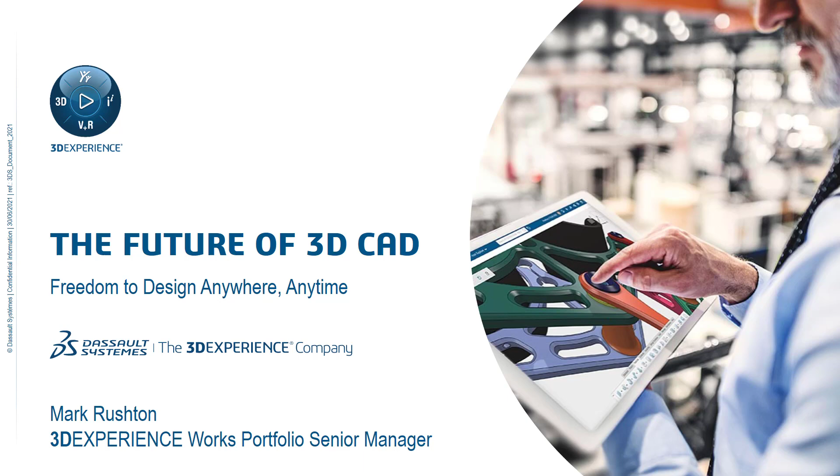Before we can look to the future, it's always a good idea to reflect on the past. In the early days, there were really two options for CAD: inexpensive 2D CAD, which was essentially an electronic drawing board, with very little in the way of automation, giving us the same kind of benefits you'd expect from a word processor like Microsoft Word did to written documents.

3D CAD was processor heavy and very expensive, but the visualization in 3D was a huge benefit. And when a new platform emerged in the early 90s, being Windows, SOLIDWORKS saw that as an opportunity to put the power of 3D onto every engineer's desktop.

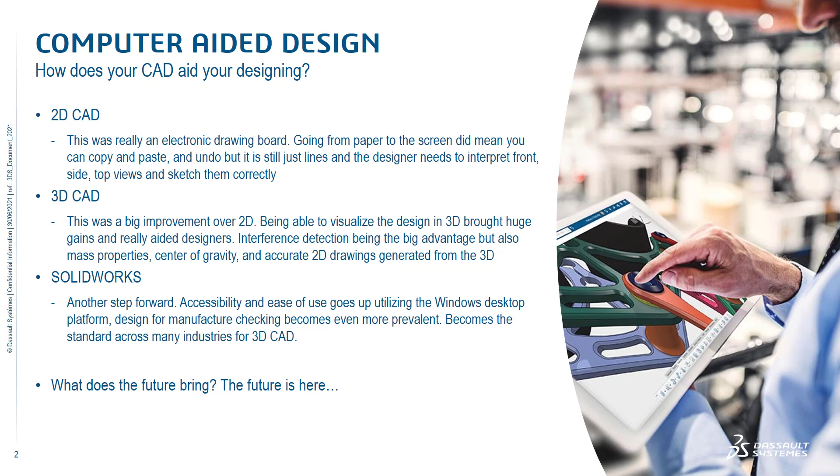And more recently, a new platform has emerged, and SOLIDWORKS is here once again. This time it's the cloud. We bank on it, literally. We communicate on it. We store photos of our loved ones on it. We use it for shopping, for dating, for entertainment. It's everywhere, and the last 18 months has only accelerated this pervasiveness.

But how does that help when it comes to the world of design and engineering? Well, design and engineering are key to competitive differentiation, and we are in the most competitive market ever. We need to differentiate based on innovation, quality, performance, and cost, and finding a balance of all of these is a challenge.

Coupled with the need to be fast to market in order to succeed and the ever increasing complexity of products, we need to make sure that bottlenecks are removed and engineers and designers can spend the maximum time adding value by addressing the needs of the market.

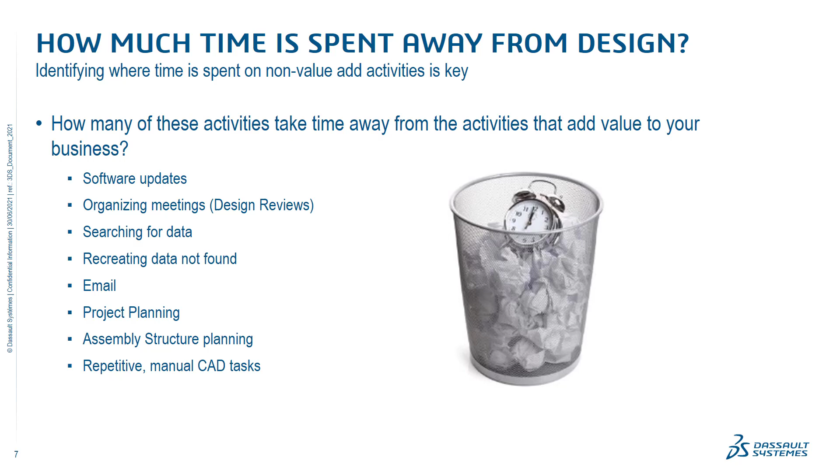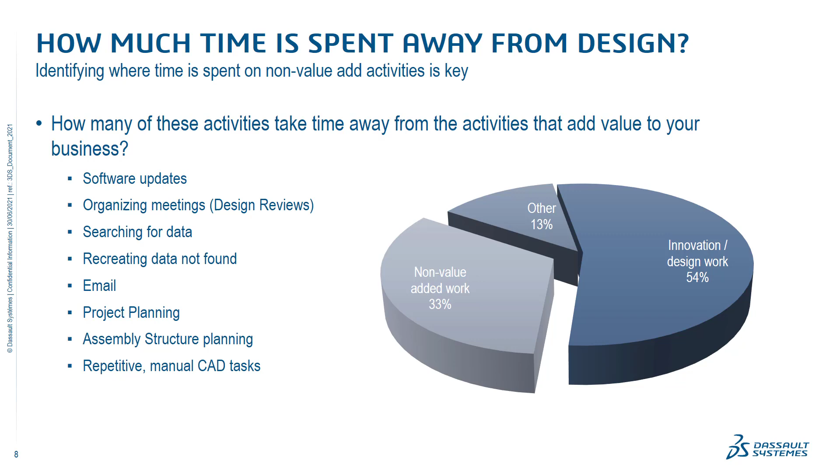We found that as much as 33% of designers and engineers' time is taken away from adding value, and only 54% is left for actual design and innovation. So what steps can be taken to allot more time to what we want our designers and engineers to be doing, what they are the experts in doing?

So at that point, we'll introduce the 3D Experience platform. It's a collaborative business innovation platform which puts the data at the center of it all, ensures everyone gets access to the information they should have in real time, but only the people that should have access. With it being a secure cloud environment, not only can you get up and running very quickly, but you can also access the data from any device, and there's no infrastructure to set up. It's all there ready for you.

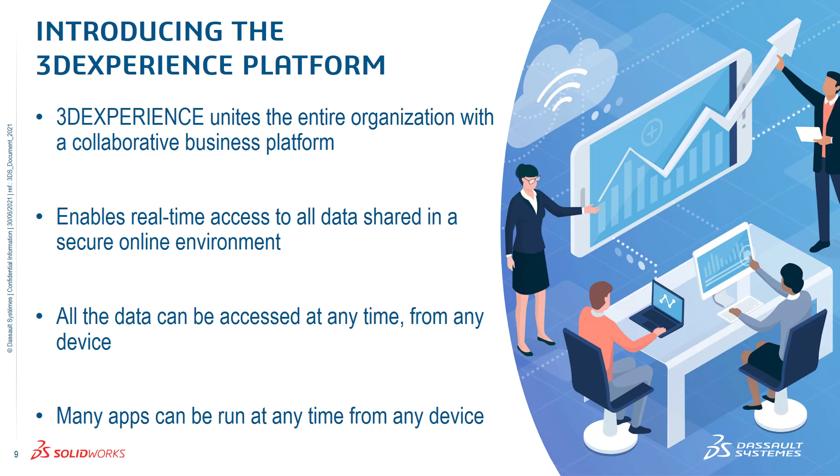There are also many apps which run solely in a web browser, so you can not only view the data from any device, but you can also create data, including 3D design data, which leads nicely on to the 3D Experience Works design capabilities, or roles as we call them. So today's webinar is really going to focus on the design roles developed by SOLIDWORKS, and we believe this is the future of 3D CAD, but it's available today. We have a full range of 3D CAD capabilities which run without needing installations or updates completely in a web browser.

If you want to work on an iPad, on the sofa, or on a laptop or desktop PC, you can just log in from solidworks.com and get designing. All the data you create is safe and secure on the cloud and can be accessed by whoever you want to see it, and only them, from any device they choose, even a smartphone.

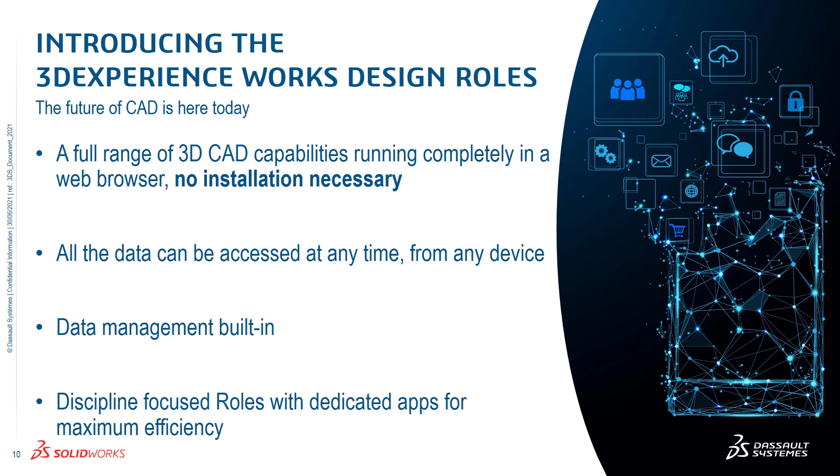When it comes to the design apps, data management is built in, so no need to worry about where the latest revision is, and the apps are discipline focused, meaning that you have the most efficient user experience possible. Nothing else to get in the way or make things harder to learn.

And when it comes to 3D design, there is no richer set of functionality anywhere else. 3D Experience Works offers more capabilities tailored to your exact needs than anybody else, completely in a web browser. And these are just the SOLIDWORKS branded roles. There are more from the other Dassault Systèmes brands and are completely interoperable with these. So you can extend and scale your design capabilities whenever and wherever you need them.

Let's quickly take a look at the browser-based SOLIDWORKS design roles. 3D Creator is the flagship and is the 3D parametric design solution, which is more than just CAD in the cloud. It comes with design guidance for inspiring new designs based on real-world loads and fixtures, reducing the head-scratching at the start of a new project.

Super features are patented technology from SOLIDWORKS. If you have ever started off with an extrude feature and then later realized you would have been better using a revolve or a sweep, but you already added a ton of child features, this one's for you. Super features allow you to change feature from one to the other without any loss of dependent features.

Revolutionary, but in a very evolutionary way. Not really any learning curve to adopt them. Then there's the unique design assistant, automating repetitive tasks and helping today with sketches, selection, assembly mates, but will be helping with much more in the very near future. This is really exciting technology and unique to 3D Experience Works.

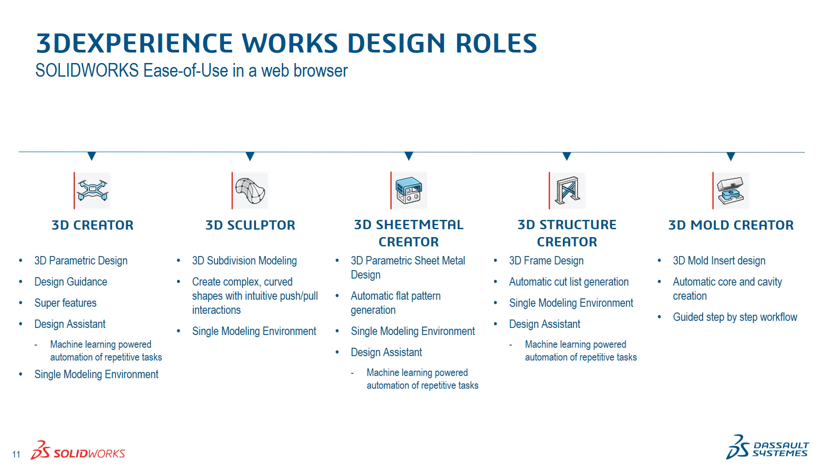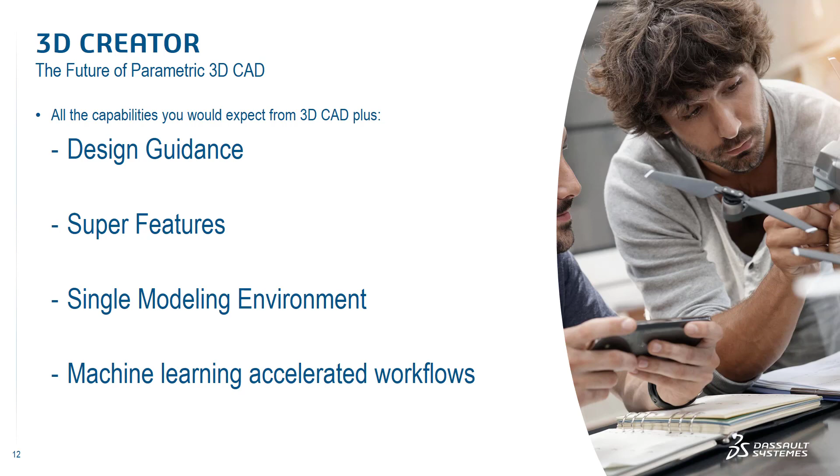So let's take a slightly closer look at what makes these design tools unique and allow you to focus on design. So first up is design guidance.

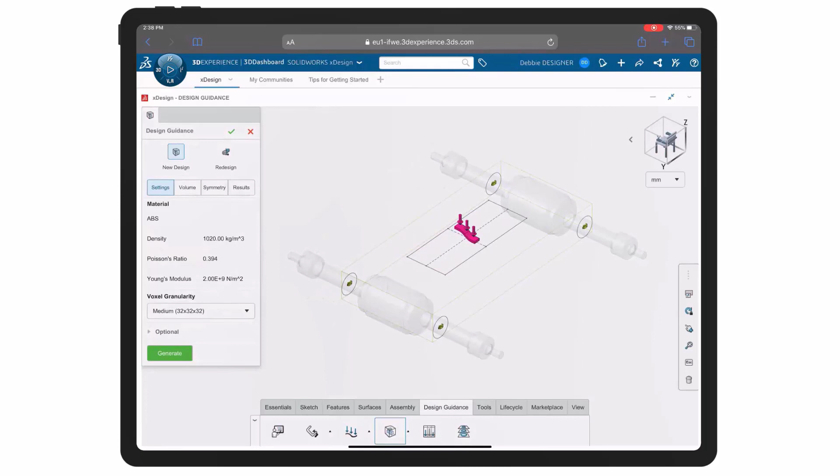Design guidance inspires your next design based on real-world loads and fixtures. This is powered by topology optimization, but it's so simple to use you would never know it. And as you can see, it runs on a tablet. It's optimized for touch interactions. If you like the suggested guidance, you have it there as a reference to make a parametric model from. Really powerful stuff.

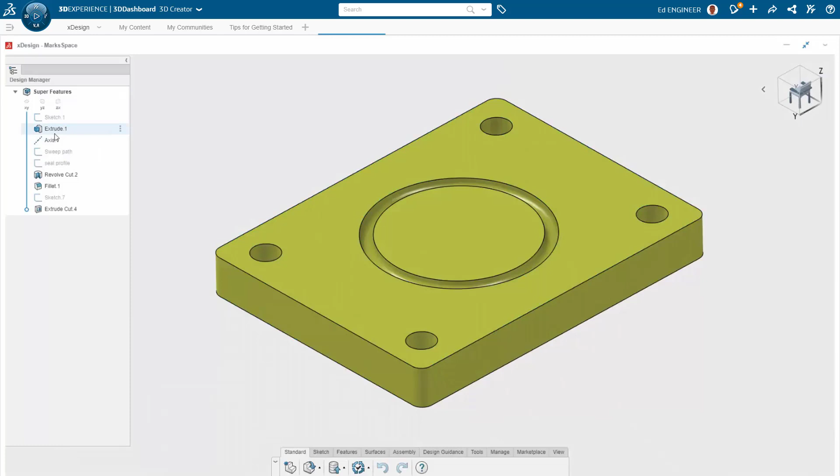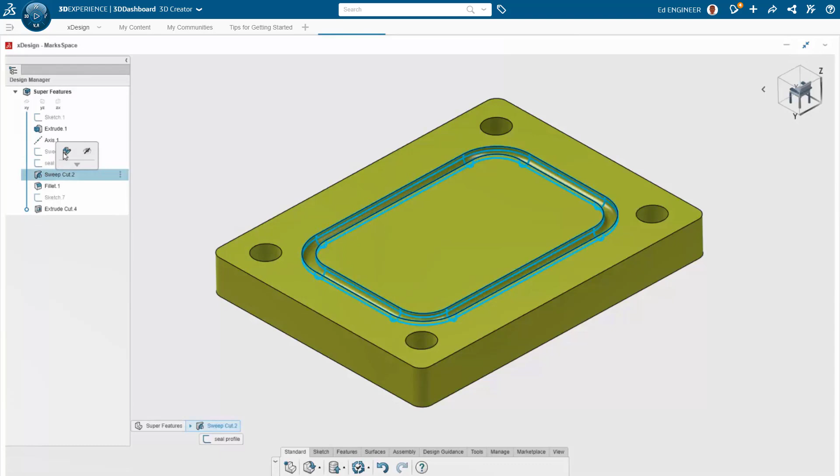Then we have super features. Here we have a revolved cut for a simple O-ring. But if the design changes and we need a rectangular gasket instead, all we need to do is add the path for a swept cut and simply edit the revolve cut feature, and we can change it to a swept cut, and we can change it back again, or we could swap it to an extrude cut if we needed, all without any concern for any child features. It's patented technology making parametric design so much more flexible and easy to use.

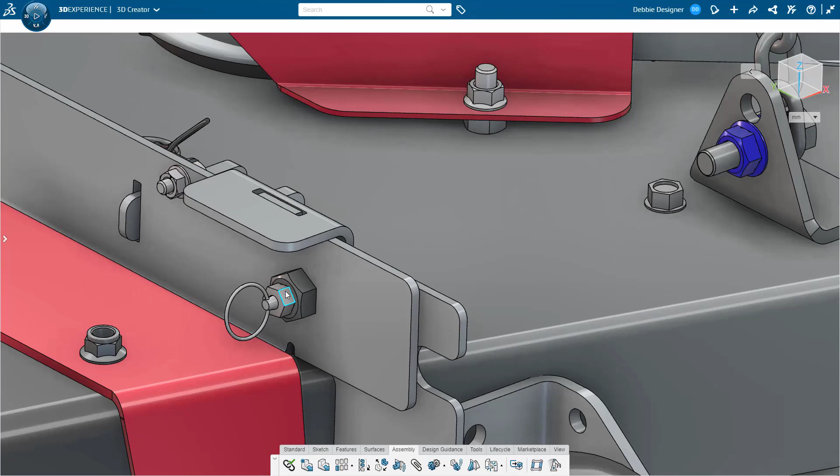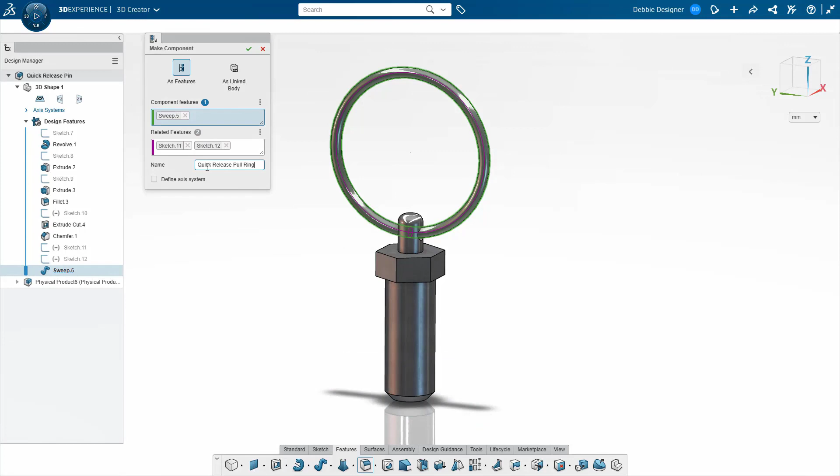Then we have the single modeling environment. Everything is a physical product. It can contain features, parts, or assemblies, and you can form sub-assemblies and dissolve them back to parts at any point in time. But here we can also dissolve parts back to features. So if we've modeled a design as a single part for ease, but the bill of materials really would be easier to manage if we made it an assembly, we can dissolve the part back to features, and then select a group of features which should be a part, and then the other set of features to make the second part, and then we have an assembly. So no need to redo any design work and no need to do any assembly structure planning up front.

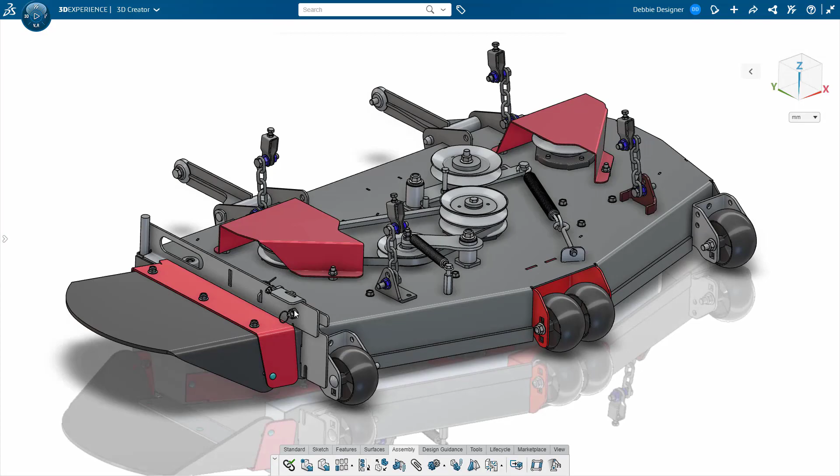Smart assistants are now part of everyday lives - to turn on our heating or air conditioning, tell us the weather, change the colour of the lights in the dining room, or order us extra soap for the bathroom. And now they're in our design tools.

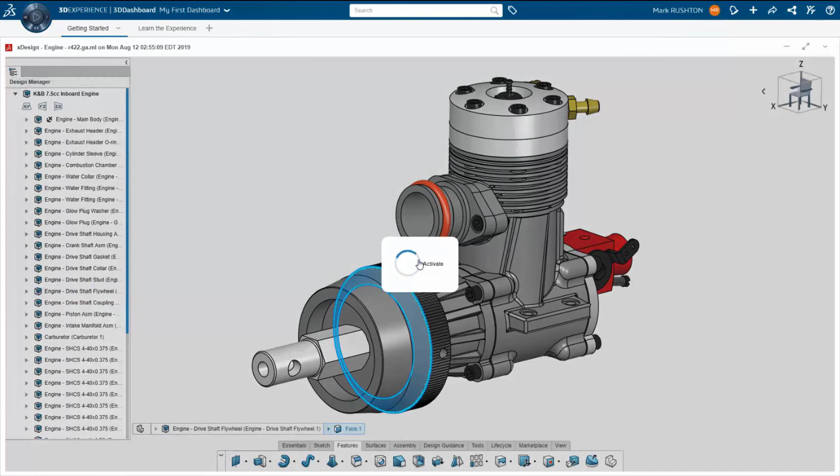Instead of us making lots of manual selections, let's let artificial intelligence predict the selections based on the first one. It recognises what we're trying to do and makes the selection for us. And the same is true for sketching - it can recognise underlying geometry, and it can also predict where we may need more sketch entities.

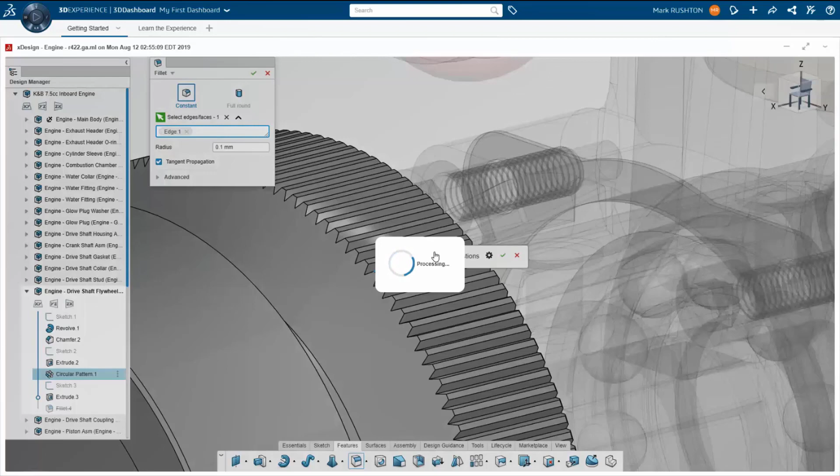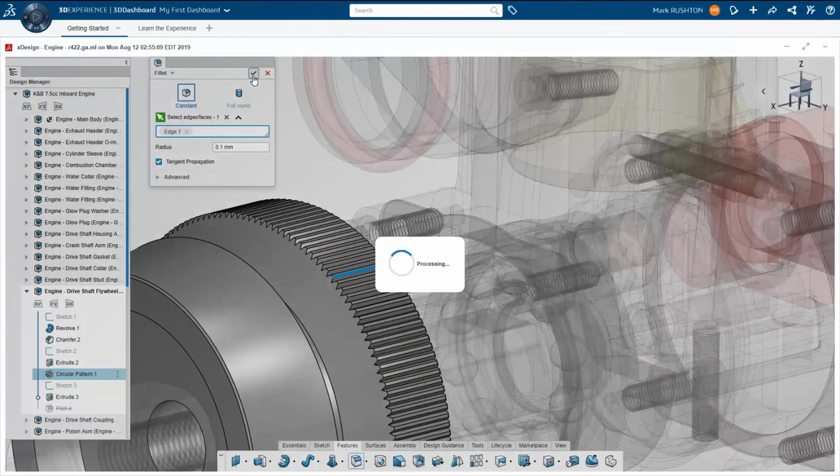So one selection followed by invoking the design assistant actually makes 312 selections in this example, all based on it being similar geometry in a similar direction, similar length, looking at the surrounding features. Real time saver. And it looks at more than just the direction - it looks at the sizes and the type of selection that we've made.

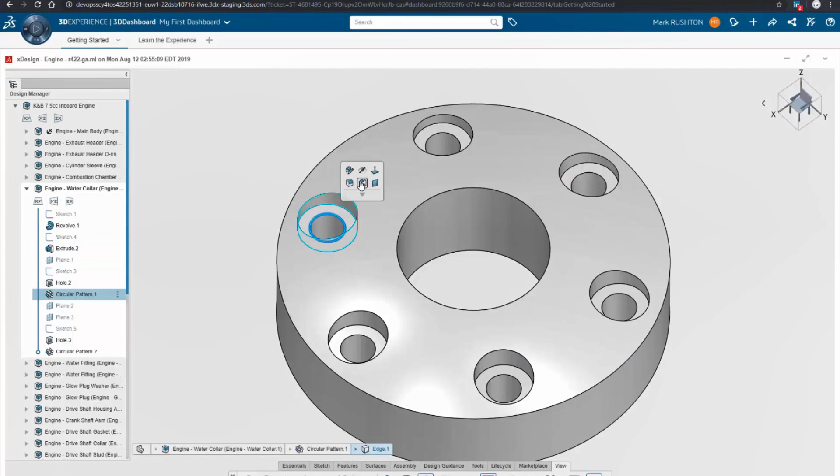If we add more selections, the design assistant refines the selection and gives us a new predicted set of selected values. So here, if we just wanted to add chamfer to all of the holes, we've actually got some holes on the side faces that are not visible, but the design assistant can see them and goes off and selects everything for us.

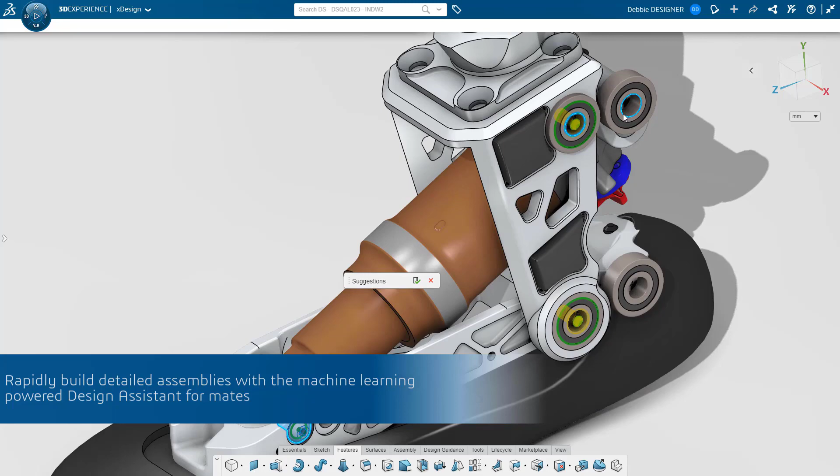Then when it comes to assemblies, the same is true. We just need to mate one component into place, and then the design assistant can be shown where else we want that same component mated in the same way. We can just quickly go through the assembly and everything is replicated and mated into place in exactly the same way, in the same direction. Really takes a lot of the manual steps away from assembly design.

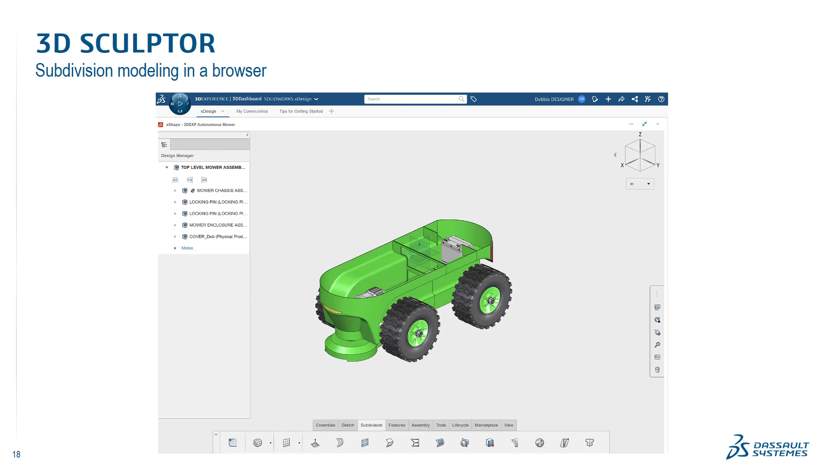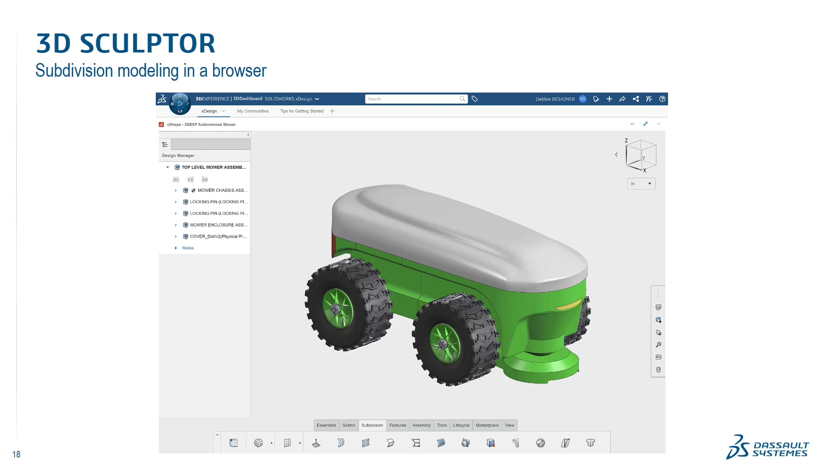Then we've got 3D Sculptor. If you've not seen subdivision modeling before - very intuitive, just literally push and pull surfaces just like modeling clay - and you get some really nice curved shapes with sharp edges and, if you need them, nice blends in a very, very short space of time indeed.

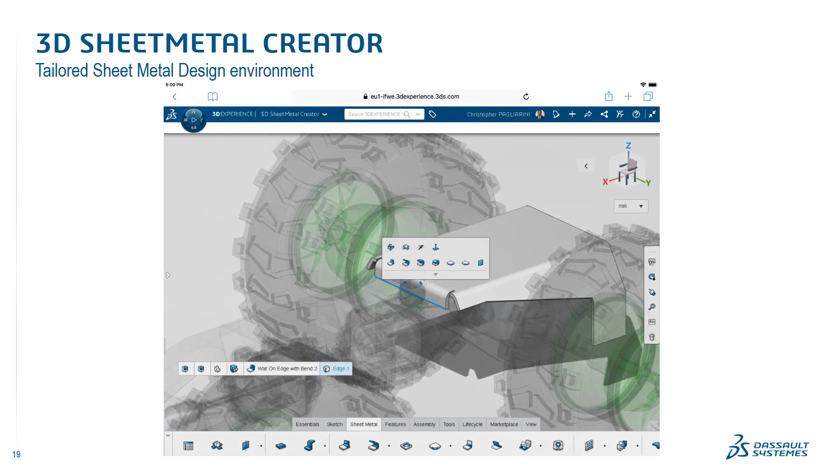Here we've got sheet metal again being shown on an iPad. We can sketch and then just click and drag to create our sheet metal designs. Really fluid user interface, and just a couple of clicks - we're only given sheet metal commands because we're in that environment - and just one click away we've got the flat pattern.

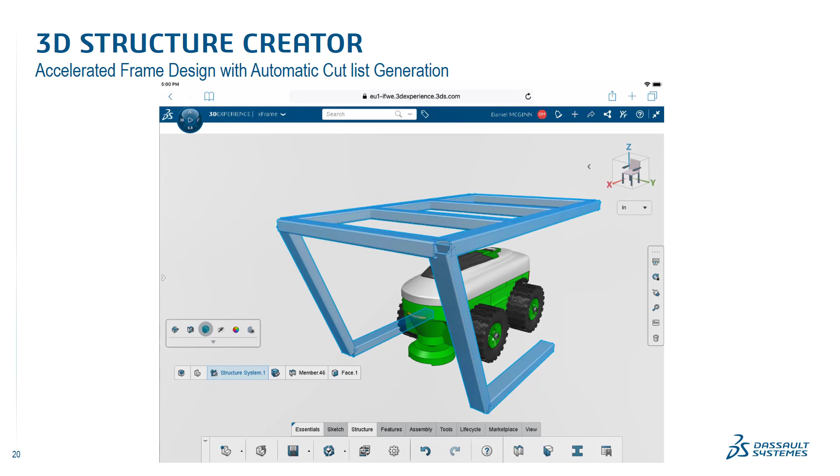Then when it comes to frame design, just a few sketches can be turned into a fully detailed frame design. We can detail the trims where the structural beams come together, and we get given an automatically produced cut list at the end of it.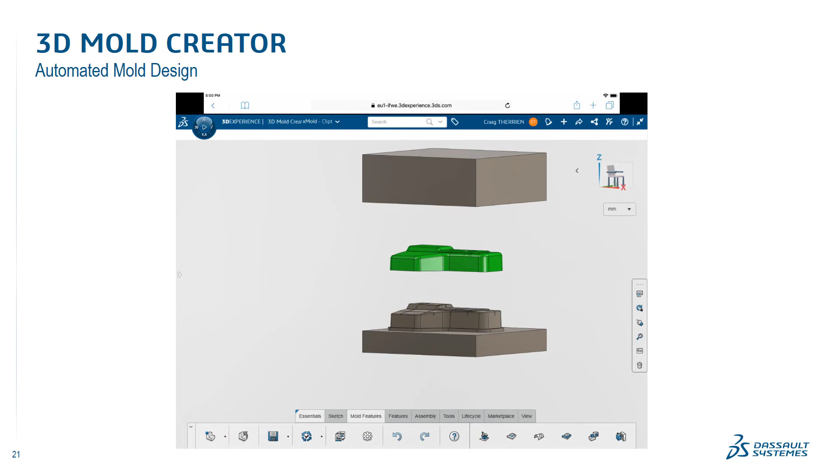And this is just a small part of what is available when it comes to design engineering within the 3D Experience Works portfolio. But as you can see, all of these roles are available in a web browser, meaning no software maintenance to do whatsoever.

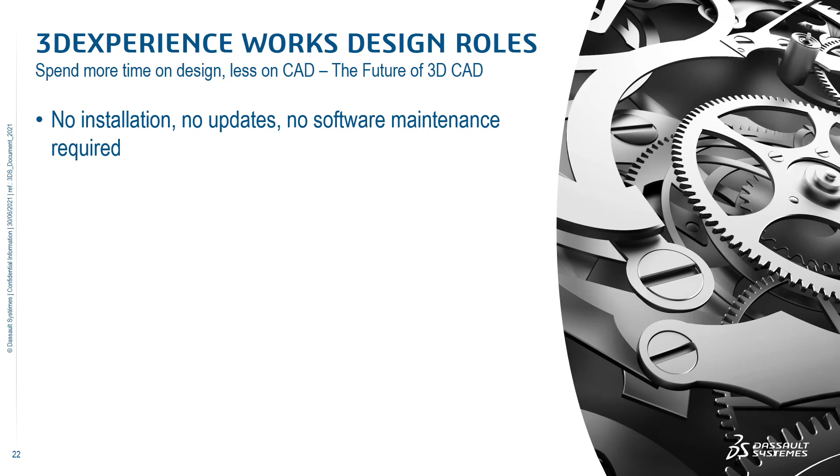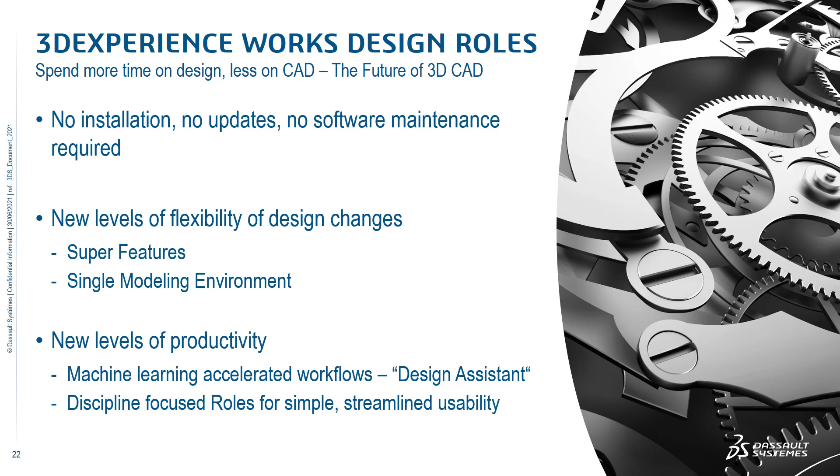Patented super features are available for a new level of flexibility of design changes, and a single modeling environment to remove any rework or upfront planning. And you can expect new levels of productivity thanks to artificial intelligence in the design assistant. And we have discipline-focused roles, meaning that you only pay for what you need, and you get a much more tailored experience.

And there's a lot more value to 3D Experience. There's a whole host more on the 3D Experience platform that we haven't even scratched the surface of today. It's a platform built on collaboration, and everything from project planning through to manufacturing is catered for and fully managed with the PLM backbone.

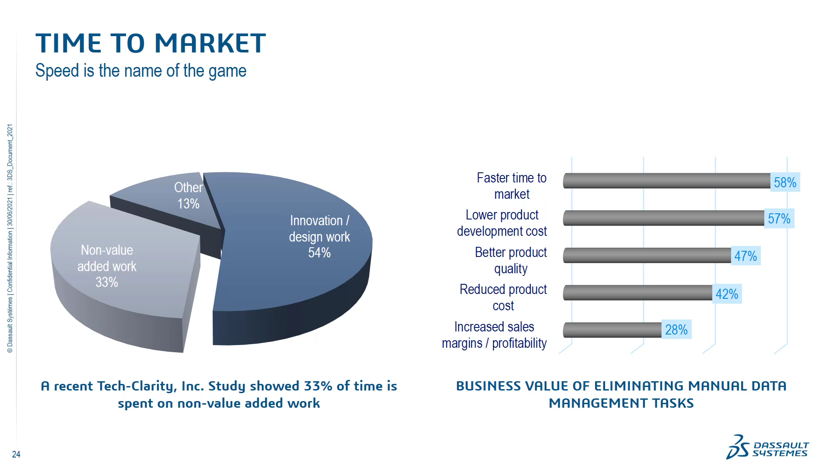So when it comes to reducing time spent on non-value added activities, you can expect to be much faster to market. And every single one of the top strategies identified by top performers to improve efficiency are all handled by the 3D Experience platform. It enables real-time access to design information.

It is a platform of integrated engineering tools. It enables the data to be accessible across all disciplines - everyone you want to have access can have access. And it is a data management solution.

It's going to improve the collaboration with other departments because everybody is on the same platform. Everybody gets the same access to that real-time design data. So it streamlines the whole process. Everything's built on a PLM system essentially.

So you can find things with the built-in search. That's going to reduce the amount of rework and you'll find problems sooner. With everybody being able to collaborate and share real-time data on the same platform, it's going to improve decision making and also improves collaboration. And as I mentioned, with everything being fully indexed by the search tool, it's really going to increase your design reuse.

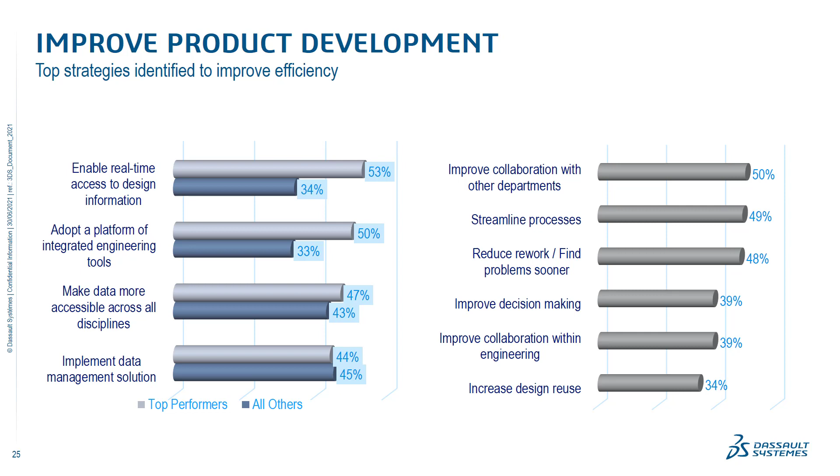So don't wait. Start to increase the proportion of your time spent adding value and take a look at the 3D Experience Works portfolio today.